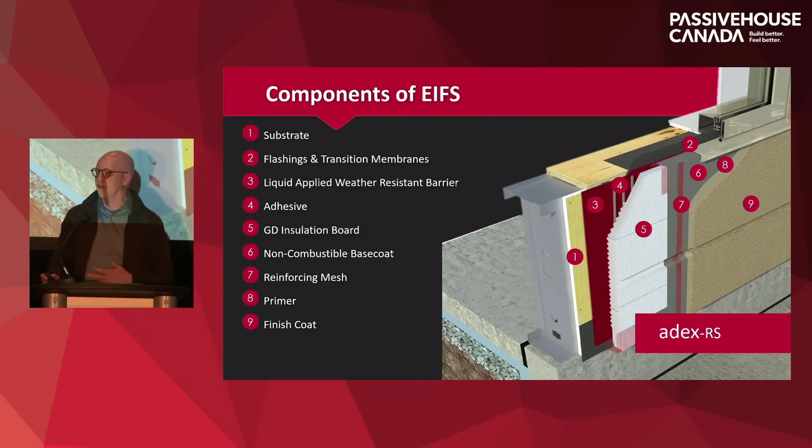Starting with the substrate, we're going on with a flashing and transition membrane, liquid applied weather resistant barrier, an adhesive layer that we embed our GD insulation board into, and then we coat that with a non-combustible base coat and reinforce it with a fiberglass mesh for durability, and then we apply a primer and finish coat. So it's an entire cladding system starting with the air barrier and including the insulation component and finishing with a decorative finish coat on top.

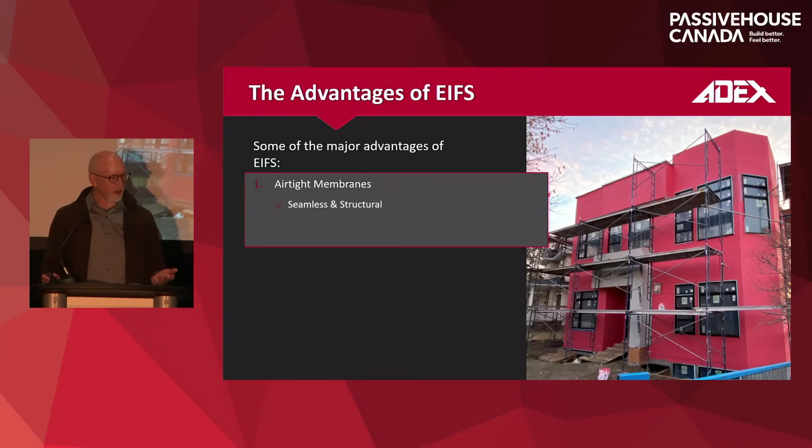So some of the major advantages of an EIFS system on projects is first and foremost the airtight membranes. So these can be both vapor permeable or vapor retarding membranes that we offer. They're liquid applied, so they're seamless and structural, adhering to the substrate. And this is going to help eliminate that airflow through the building envelope.

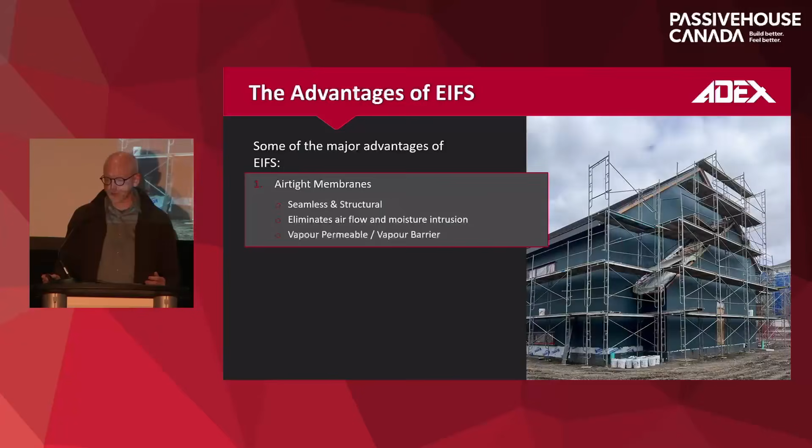Next advantage is that continuous insulation. We hear a lot of talk about CI and reducing the number of thermal breaks that we have within the building. So having that continuous layer of insulation is just like your winter coat in wintertime. You're trapping the heat inside, and this is one of the big advantages of an EIFS system.

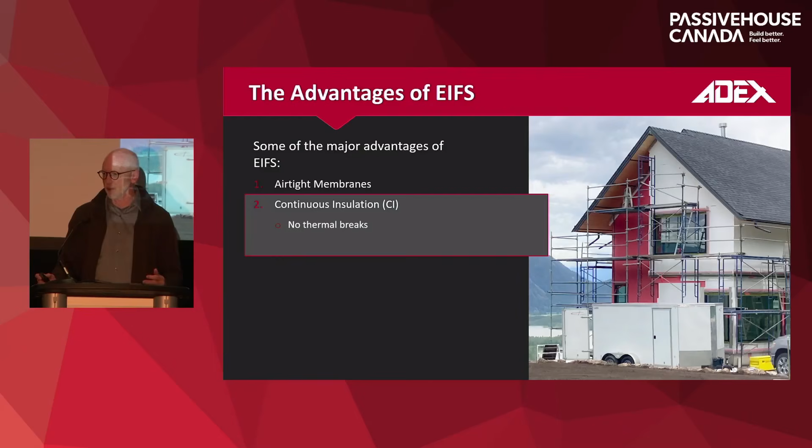And we all know that insulation is the most effective when we put it on the outside of the building. So just looking at a thermal image of a house with just batt insulation inside the cavity, and then one on the right-hand side with exterior insulation.

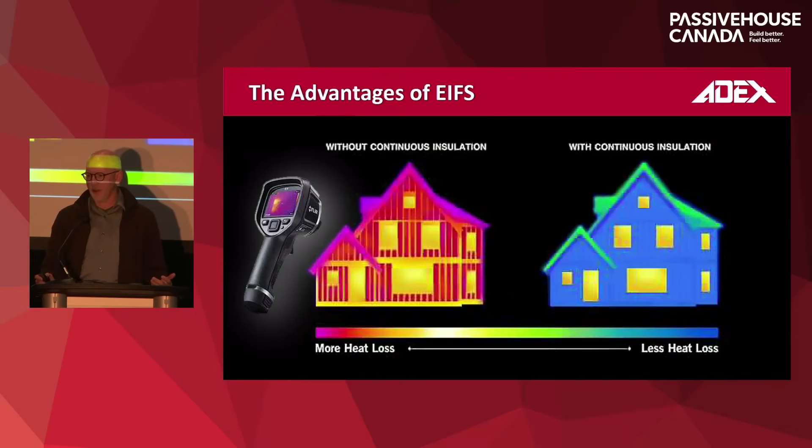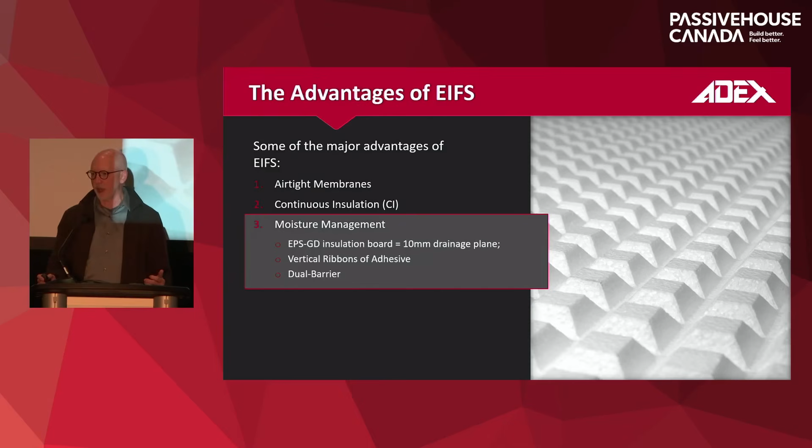The next advantage that EIFS has is moisture management. So the insulation boards actually have a 10 millimeter drainage cavity, so it allows for moisture to migrate through the system should it get behind the cladding system. These are all dual barrier systems, so the skin of the system actually takes the most weather abuse, but there is that backup system that's going to allow for moisture drainage should it get into the assembly.

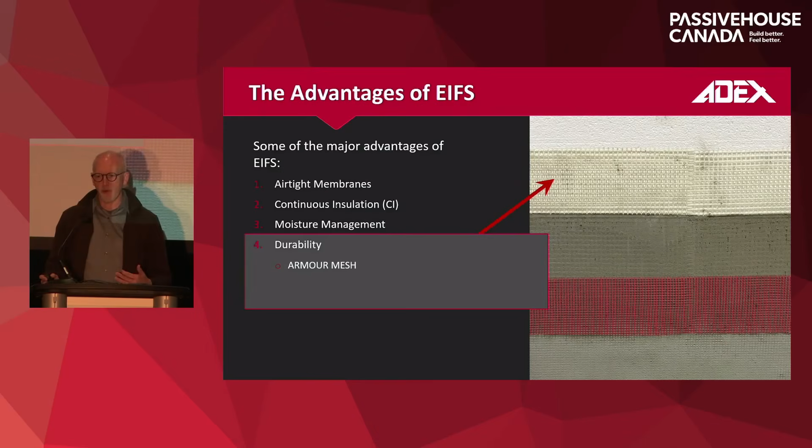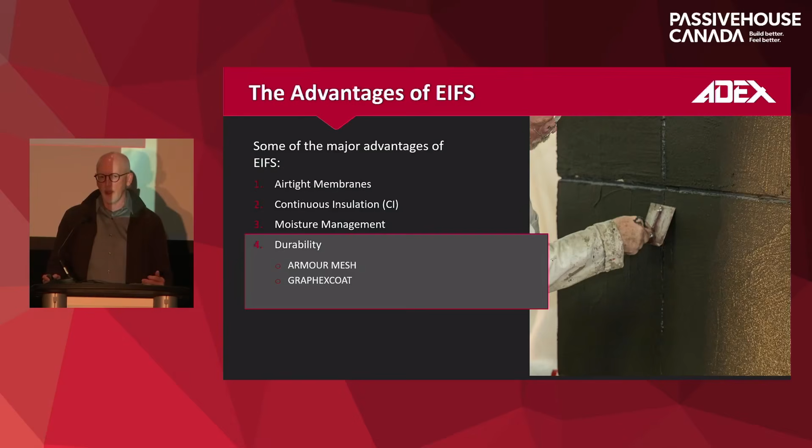And then durability. So we have a variety of different fiberglass meshes that are embedded into the base coat during installation. And we put armor meshes into high traffic areas. So that's going to allow for the typical abuse that you would expect in those high traffic areas. We have bird resistant coatings. So we all know that woodpeckers affect places like the Okanagan, southern Alberta. And so we have a product called GraphexCoat that is bird resistant.

And then EIFS is expanding into other claddings where we have an adhered brick and stone system. So our Adex ABS system where we actually adhere veneers to the EIFS assembly.

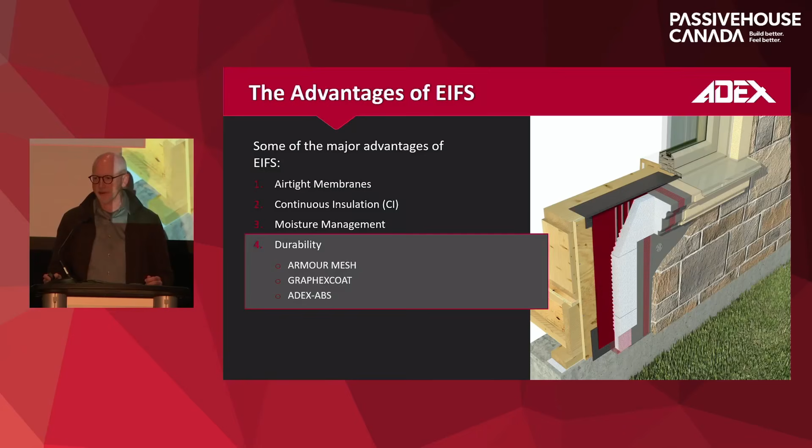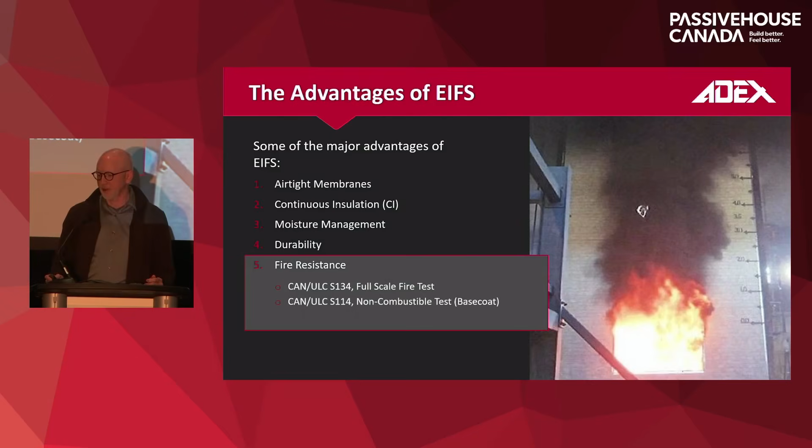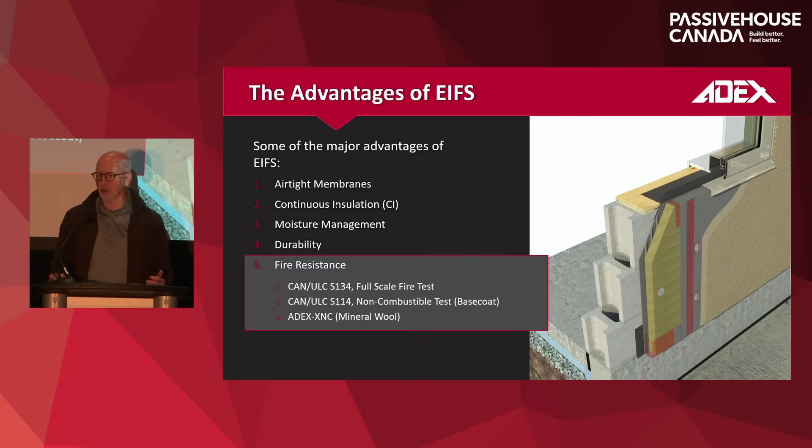Lastly, fire resistance. So EIFS systems go through full-scale S134 fire tests. We can do large projects. We've done 30-story high-rises, for example, as well as the base coats are tested to an S114 non-combustibility test. And for those really stringent walls where we require no combustible materials, such as walls that only allow for less than 10% unprotected openings, we have EIFS systems now that have mineral fiber as the insulation component.

There's a code within Canada for EIFS. It's CAN/ULC S716. You can find that referenced in the building code. CCMC, the Canadian Construction Materials Centre, they use that code to test all the materials. EIFS, because it has so many products in an assembly, we go through quite a rigorous amount of testing to meet these evaluations.

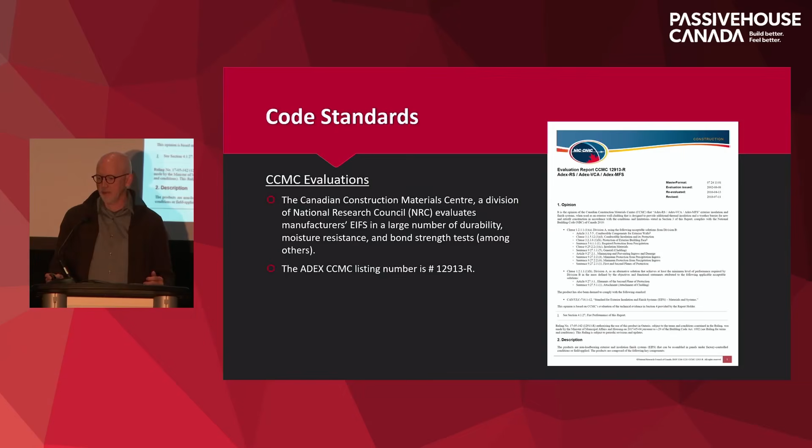And so the scale of the types of projects that EIFS is used on is everything from single-family, multi-family projects, high-rises, and all sorts of unique infrastructure projects like schools, water towers, et cetera.

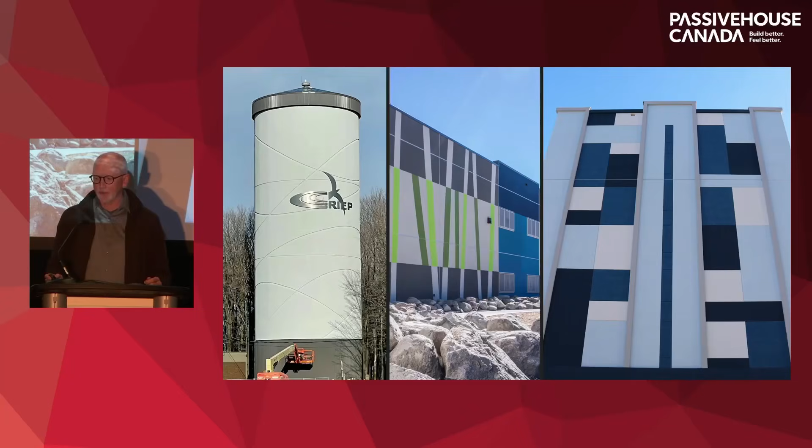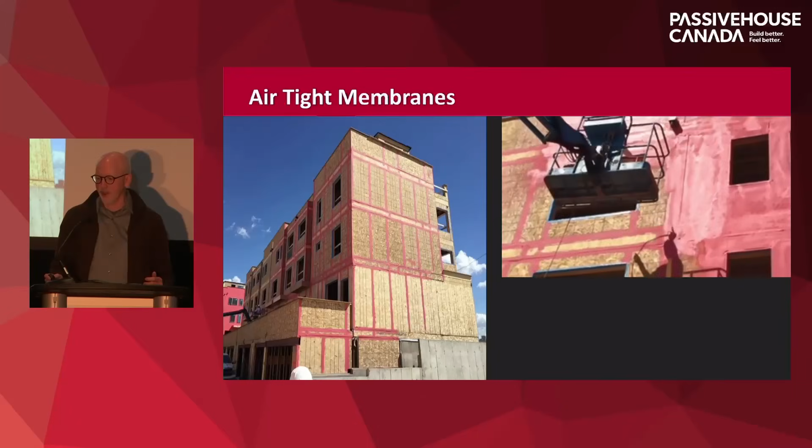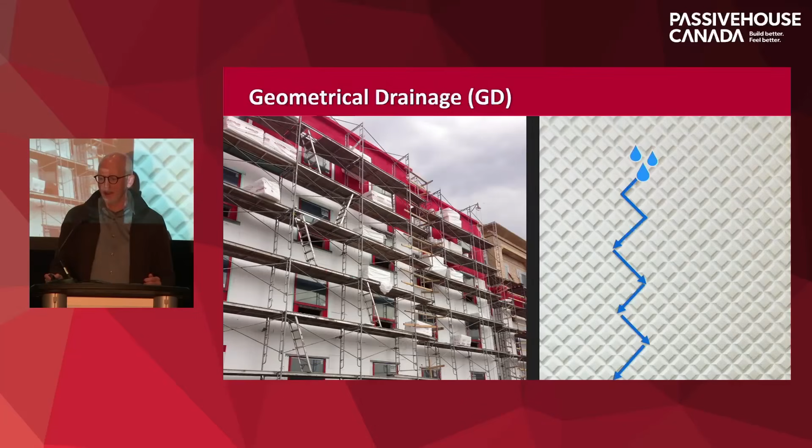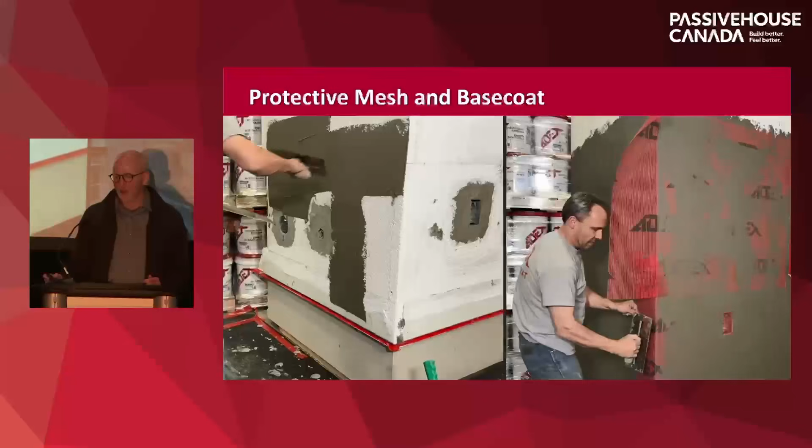So just looking at how the system goes together and the major components, it starts with that airtight membrane where we seal up the sheathing joints. And they spray or trowel on the airtight membrane. That drainage board, you see the drainage pattern in the back of the board. That's going to allow for moisture to travel through. And that's adhered on using a cement adhesive. Protected with an acrylic base coat using fiberglass mesh. So you kind of get an idea and see how the assembly all goes together and wraps around your building.

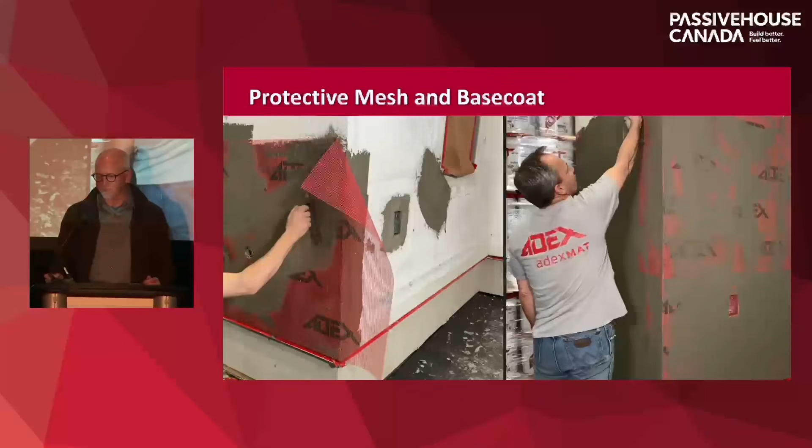And a big advantage of EIFS is the number of finish coats that we have on the exterior. So we can do different types of stencils, older Venetian style, very unique mosaics, as well as your standard finish coats, which tint up a lot like paint products, so colors are pretty much endless.

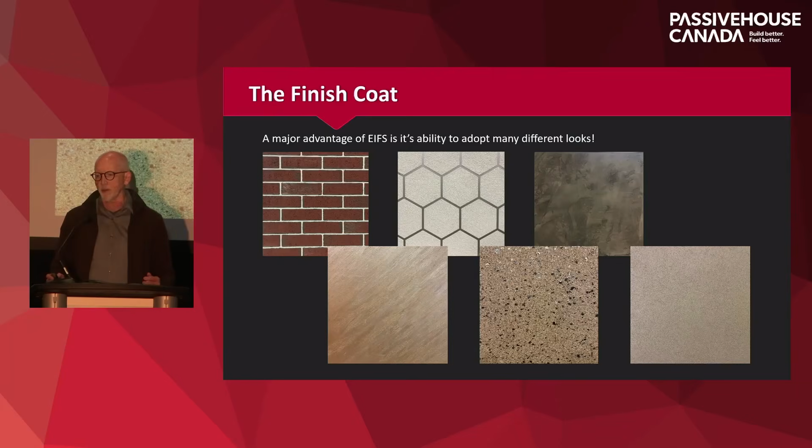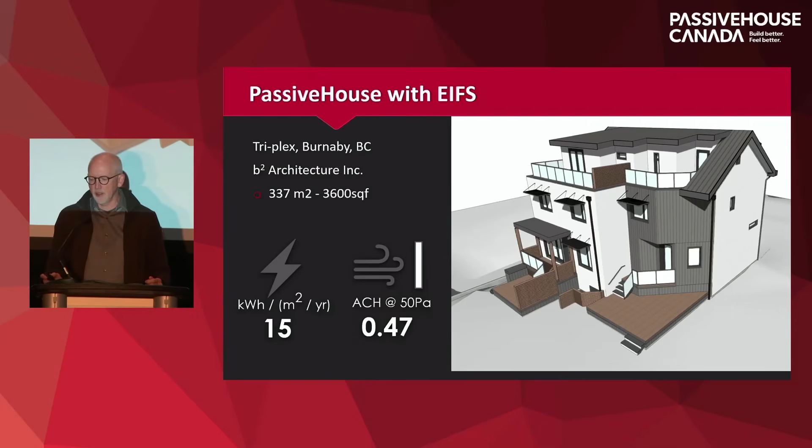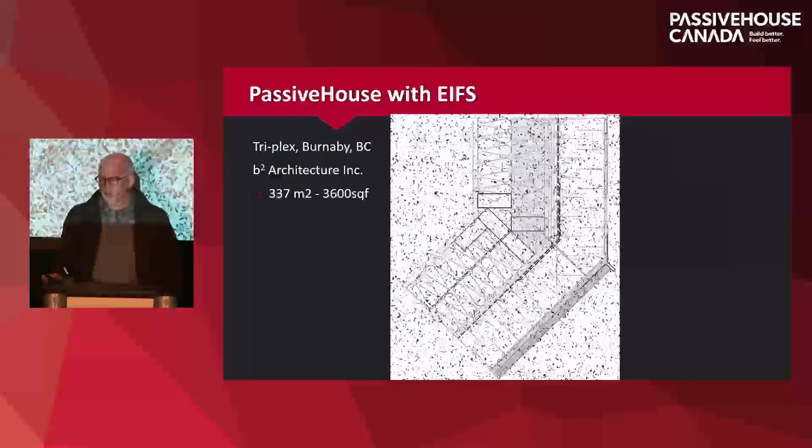This is a project in BC, in Burnaby. This is a triplex. The nice thing with the blower door tests, they received a 0.47 in their testing. And this uses our Adex RS system. And I believe it was a 5-inch system on the exterior.

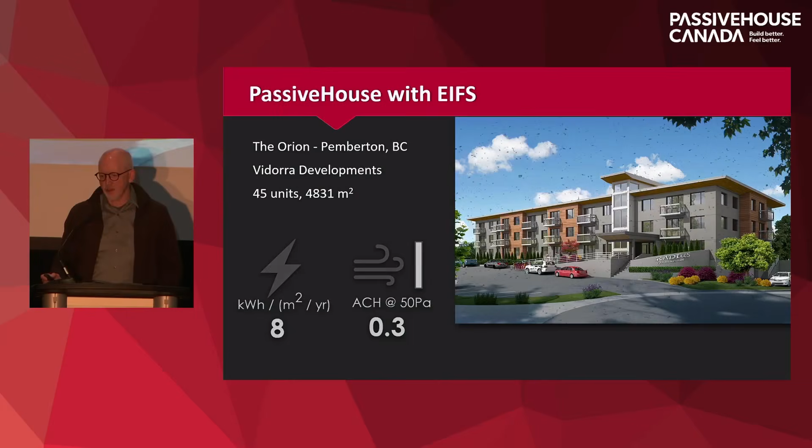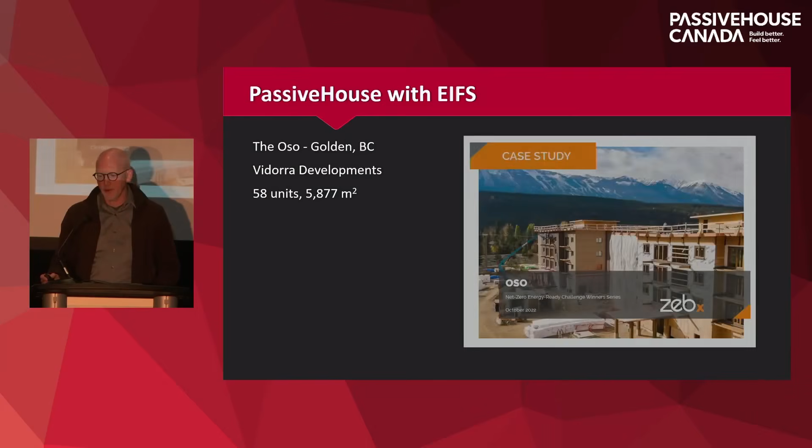And this is another project, the Orion in Pemberton. This uses more traditional construction, 2x6 construction with a 6-inch EIFS system on the exterior. Blower door tests of 0.3, and the same developer, they've gone on to do the Oso in Golden with similar results, a 0.3 in their air changes per hour. So really airtight, great way.

What the developer really likes about the system is it's relatively lower cost to him, so he's able to deliver projects that are better thermally efficient at a lower price than what people are currently building for.